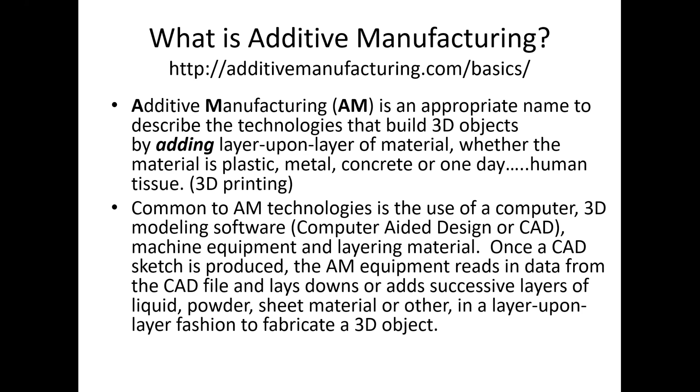Metal casting was one of the original users of additive technology. We're not Johnny come lately. We're actually among some of the very first people who used additive technology. We used SLA to make plastic parts that could be turned directly into investment casting. We used it to print or cut layers of paper and make patterns out of it. You can see that we had a seminar back in 1999 with Jim Conley talking about fast freeform fabrication as a way of moving forward the technology of additive in steel casting technology.

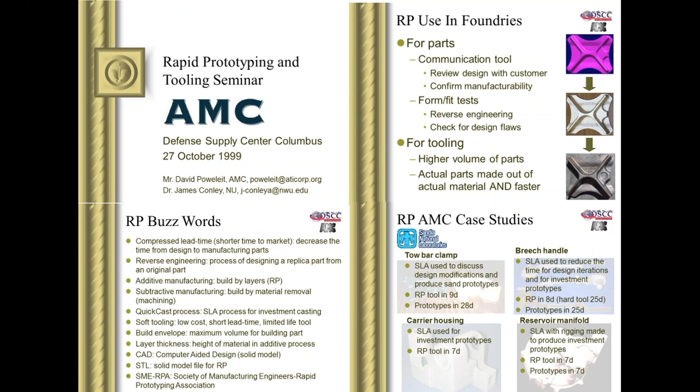So to give you some background why Steel Founders Society and additive: steel casting producers are one of the most, if not the most, advanced users of solid models and process modeling. Most steel foundries have solidification modeling, and they use that to manage their process and ensure quality. We were also early adopters of additive because our solidification model already used STL files, so we already had the infrastructure to move those over and make investment casting patterns, prototype tools, or printed sand molds or ceramic molds and cores.

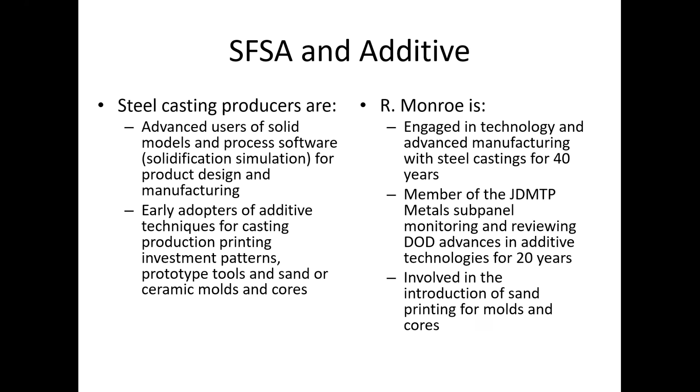Now, personally, I've been engaged in technology and advanced manufacturing for steel castings for over 40 years. I've been a member of the Joint Defense Manufacturing Technology Panel, Metal Subpanel, as an industrial advisor for over 20 years. This is the panel that would review all of the DoD-related advances in additive manufacturing. So I've been involved from the very beginning of the development and transition into use within the Department of Defense. And I was involved with Ralph Resnick, who was the first runner of America Makes, when he brought the ExOne, the printed mold technology, over to the US. So we've been involved with additive from the very beginning.

And so I thought I'd go through briefly some of the advantages and then talk about some of the issues. I tried to give you just a flavor of how additive and steel castings interact.

Now, what makes a part attractive for additive manufacturing? If I can put several parts together that I used to have to make independently, if I can put more functionality in the part, if I can reduce the weight of the part, these are the primary benefits. Less waste is less attractive, although for expensive materials, it can be important.

One of the big advantages are these first two: lead time reduction. If I've had to make tooling or do process development or acquire material, with additive manufacturing I may be able to reduce the lead times dramatically. And if I only have a small amount of production or I have obsolete things, I can reduce my inventory of both tooling and parts if I can manufacture them rapidly with additive manufacturing.

These two are not nearly as clear. Supplier risk: additive has the same supply chain kinds of issues as any other manufacturing, so it's not clear, and in fact, oftentimes when you have a critical part, you have to qualify both the process, the machine, and the supplier. So you may have less supplier redundancy than you do with other manufacturing methods.

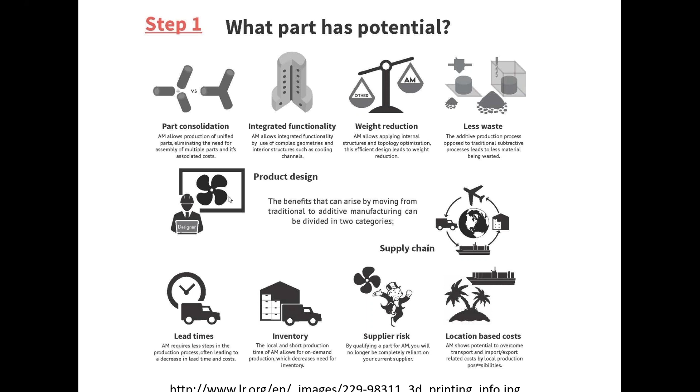Additive, one of the big benefits is it gives design freedom. Traditionally, mechanical engineers and other design engineers oftentimes put things together the way kids put Legos together. They have standard mill products that they cut into pieces and then weld or bolt together. With additive, I can have complete geometric freedom.

So these are some example geometries where you wouldn't ordinarily make any of these geometries out of fabricated parts. Some of these aren't bad for fabrications, but they're not attractive. But you can make all these clever geometries to achieve certain design characteristics.

So traditional designs often rely on standard material forms. One of the key historic attributes of castings is this design freedom. It's hard to imagine how you can get the internal passages and the complex material shapes for engines, heads, and blocks if you didn't have casting technology available. Additive early on was called fast freeform fabrication, talking about its geometric capability.

And of course, all techniques that have internal cavities, whether it's casting or additive, you still have to be able to look in that hole, get rid of the material, and inspect and make sure you've made the part.

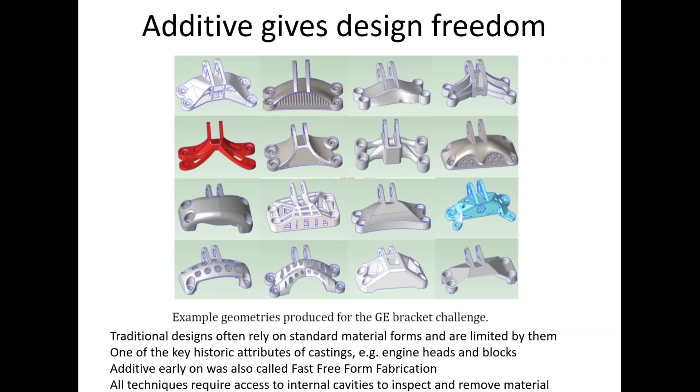One of the biggest benefits is castings. One of our biggest challenges historically has been to make the first casting, I have to make a tool. And the time and expense of making the tool may take so much effort and so much expense that you can fabricate or machine 5 test articles in the money and time it takes me to make the tool. So making that first tool took time and money.

Not only that, it meant that you already had committed to a particular design concept and had limited opportunity for improving and changing it. And so additive actually accelerates the development dramatically. So instead of 8 weeks to get a tool, I can give you a part in 3 weeks.

But it's better than that. I can not only give you a casting in 3 weeks, I can actually give you 4 different castings for the same part. So if you have alternative design concepts, additive manufacturing, additive printing of molds or cores allows me to make 4 different concepts without ever committing to a tooling. And that allows you to try some really crazy idea that you never would have tried before because you couldn't afford the tooling and the time, because it can be in parallel with the more traditional and safer designs.

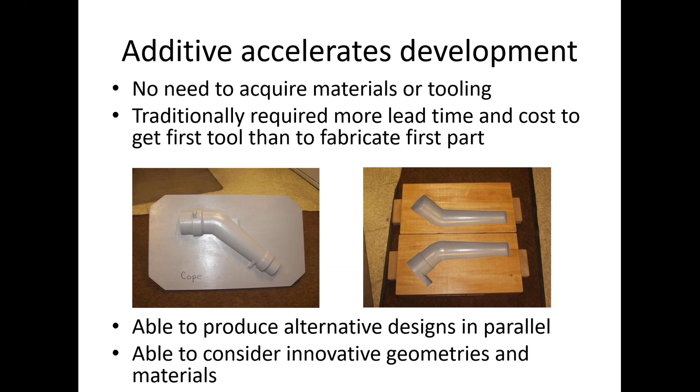So this is huge. I imagine that everybody that's creative and innovative in design is going to need additive manufacturing to accelerate their design process, and castings enable that by giving you qualified metal parts with good, reliable properties in alternative design paths that let you maximize the creativity and innovation of your design process.

If I look, additive allows for toolless production. So all of these tens of thousands of obsolete patterns, if we had solid models and we could print them, we could eliminate all of this sunk investment and this ongoing storage cost and maintenance cost.

But the challenges include: most of the time in traditional and obsolete parts, we don't have a normative, authoritative solid model. Oftentimes the parts are compliant with the existing tooling, but not with the actual drawings. And I may have a higher part cost and limited production by using printed molds.

But moving into the future, we certainly can see that obsolete and old, out-of-production, limited-production items, whether upfront or afterwards, will be made using this technology.

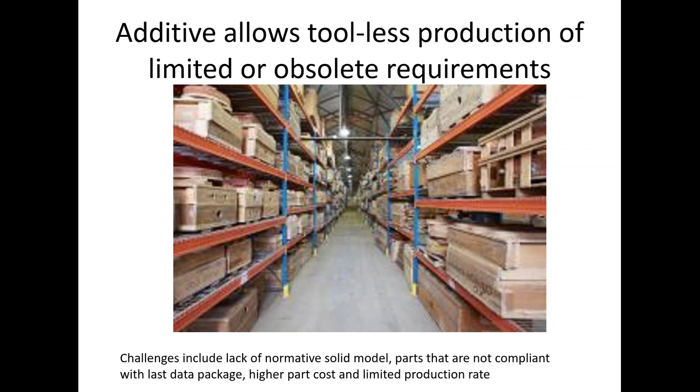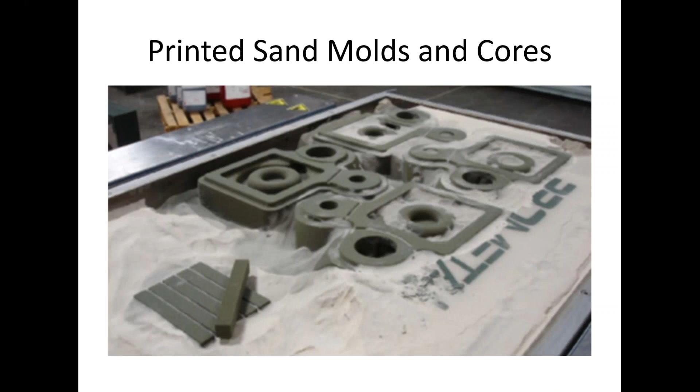We can print sand molds, and that's the huge benefit. I can get the additive benefits from printing the mold, and then I can get the metal performance out of pouring the mold with a reliable casting alloy.

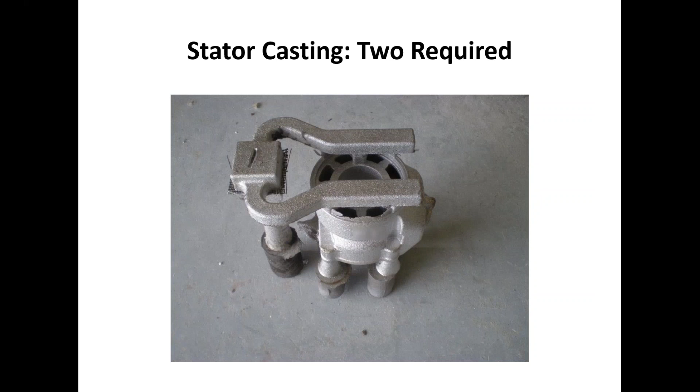And you can see we can make really complex molds. One of the best benefits, if we only need 1 or 2, we don't have to recreate the expensive tooling. We can make the 2 directly if we can get the solid model.

One of the biggest benefits right now is if I have complex parts like impellers that have multiple pieces, I can actually print a core faster and cheaper than I can make the core or make the die, and that saves me money directly. But it's better than that.

I actually reduce the dimensional variabilities, because instead of assembling several cores, I can make it as a single piece mold core combination and get much more repeatable and tighter tolerance parts.

That's one of the big benefits the Air Force is seeing in printed ceramic cores, because these little cooling passages used to have to be drilled, and so they had to be perpendicular and they had to be round. Now, if I can print a ceramic core, I can positively locate both the cooling passages and the vent holes and know that they're going to be in the right place, and I can change the geometry.

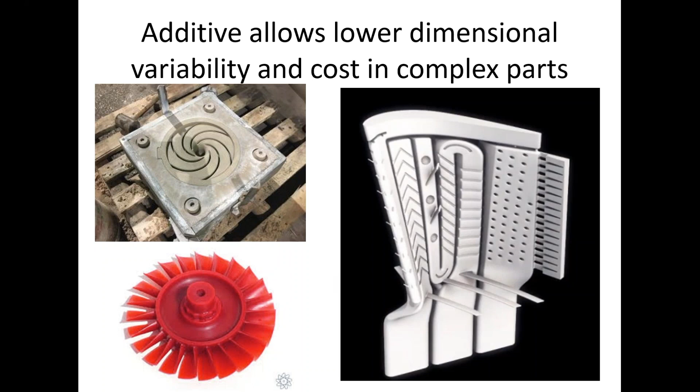So this is huge, being able to control dimensions and geometry and location in a way that I never could with assembled molds and cores or other manufacturing technology.

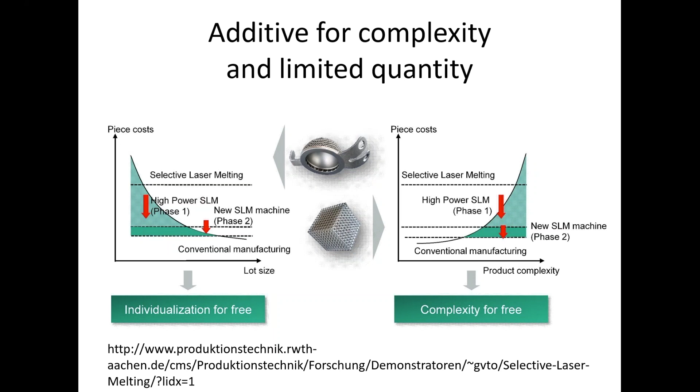So you can see that there's really two fundamental concepts that make additive attractive. One is if I'm only making a few, then I can eliminate the tooling and the development costs and go straight from the solid model. Or if I have a part that's really complex, then being able to manufacture it with additive gives me both the complexity and the cycle time that I want with low cost and high performance.

So what production process? I was delighted to find this because they recognize that printed sand molds, the ExOne or the voxeljet process, or the printing process, allows you to consider castings as one of your additive processes.

The others, of course, are powder bed or directed energy deposition. These are really welding techniques. Here you're welding, you're fusing or sintering the powder onto the part. Here you're actually welding the part together.

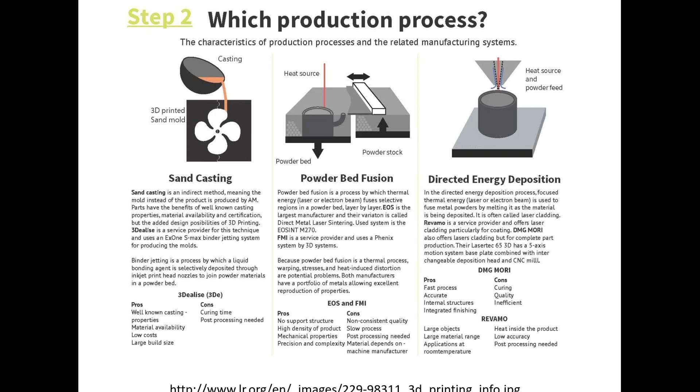So one of the criticisms some additive people make is that when I make a casting, I use production welding to meet the quality requirements. But if I'm doing additive manufacturing, the whole part basically is made with fusion welding type technologies. And so this is really the kinds of processes you can get, and here's a picture of them.

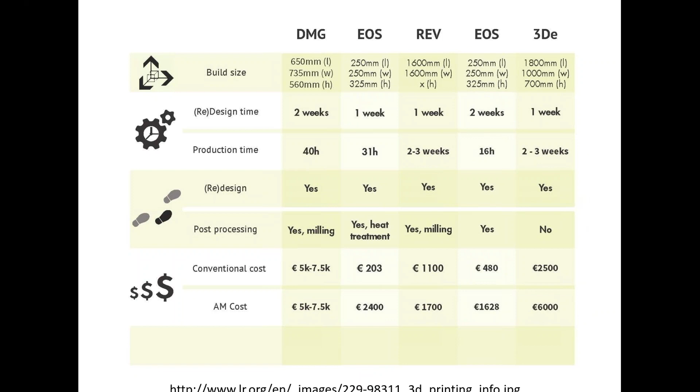You can see in this picture that most additive parts have really limited sizes compared to castings, and you have limited alloys. So it really is a challenge to make the maximum flexibility in a part without having castings as one of your opportunities. If you look at the materials, oftentimes you may want a bronze alloy, but the only thing you can print is a stainless steel. In castings, we can make the whole range of alloys. In additive, you have to depend on the powders that are available, the machines that are available, and the properties you need, so there are some real limitations.

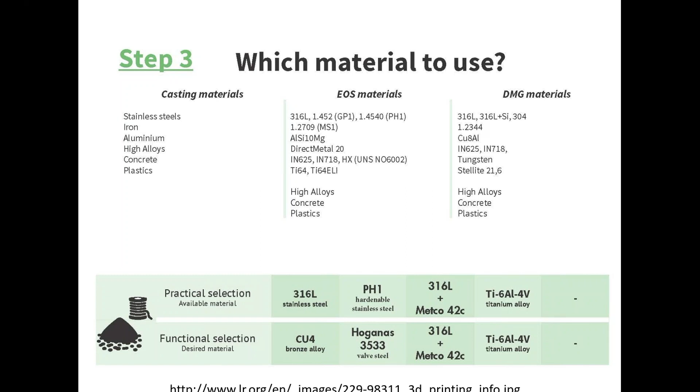Now, many of those limitations will go away, many of the limitations of performance will go away. But at this moment in time, there are some real challenges to being able to fully utilize additive metal printing. One challenge is that, depending on the orientation, horizontal, vertical, different angles, different post-processing, you can get a wide range of properties.

This is for 17-4, a high-strength stainless steel used in structural applications. You can see, depending on orientation, my yield strength can be half of the yield strength of the mill product, and my ductility can be well less than half. Now, that's not always common, but because of that, there are none that I'm aware of - standard processes with standard properties. So virtually every critical component in additive manufacturing where you're metal printing has to be qualified based on the source, the machine it's made on, its process, and part verification or part qualification. That's a real challenge.

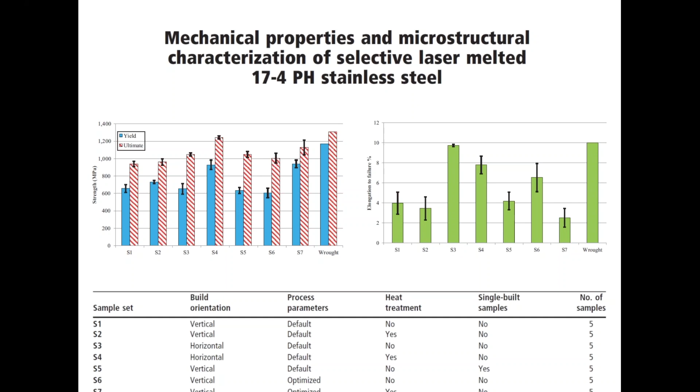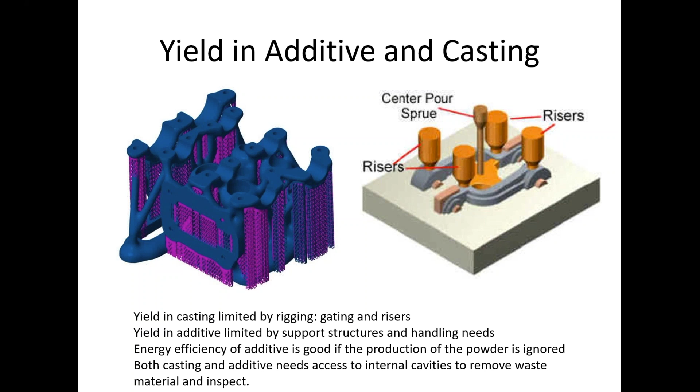Many of those problems go away because metal casting is a well-known technology. One thing people will talk about is yield, because at least notionally you get 100% yield since you can reuse the powder you didn't fuse. But oftentimes in additive you need a support structure to make these complex geometries. So the yield of a casting, which is limited by the plumbing system, the gating, and the risers, versus the yield on an additive part, is limited by the support structures and the things you put on it to handle.

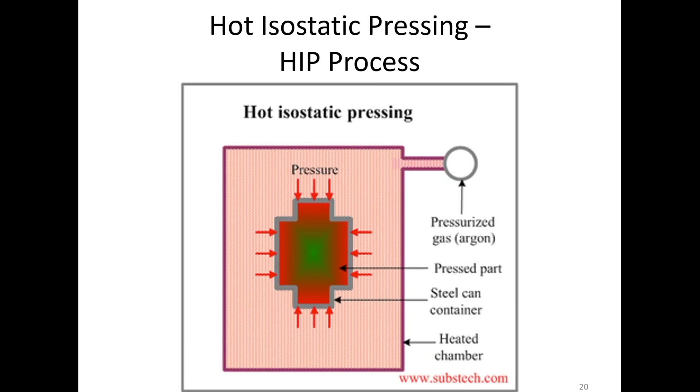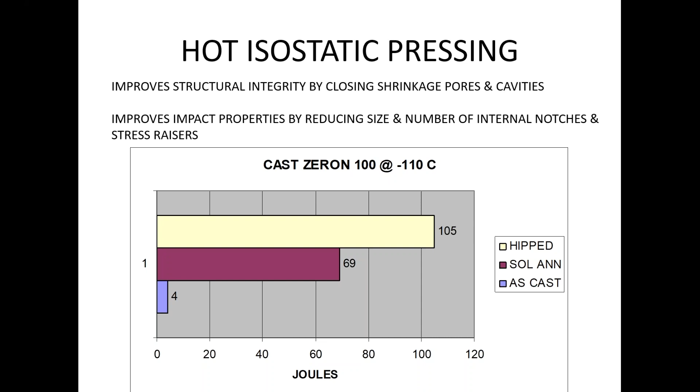One of the great benefits is that many of the quality challenges and performance challenges of printed metal molds are similar to the challenges of getting optimal properties out of casting. For example, additive routinely uses hot isostatic pressing to maximize mechanical properties. We get the same benefit in castings by using hipping. So the infrastructure for design, quality assurance, and post-processing used for additive manufacturing will seamlessly provide benefits for steel castings. You can see this is hot isostatic pressing of the cast Zeron 100 material. The solution annealed material gives really nice impact properties, but the optimal impact properties come from hipping because you reduce the size and quantity of small shrinkage pores and cavities.

If I look at a comparison, printed metal parts with additive are the newest and coolest technology. If you want young people to come through your facility, you want to show them your printed stuff. The VP of operations or marketing wants to come through and see your printed molds. But it requires source and part qualification. One huge benefit we don't have in castings is that you can make constitutionally graded material, going from a hard surface to a tough, ductile center by changing the material as you build the part. And of course, the parts are limited by the machine size.

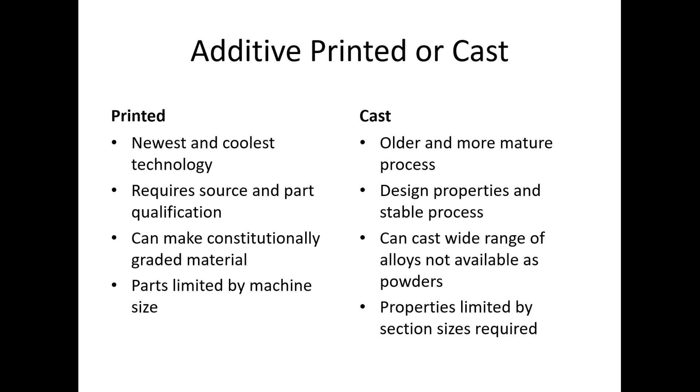In casting, you have an older, more mature process, which has both advantages and disadvantages. The advantage is being well known and having a controllable process. The disadvantage is it looks like old technology, so it's not as exciting. You have design properties already available in a stable process. We can cast the widest range of alloys of almost any process, and the properties may be limited by section size. In a printed metal, since it's a welding technique, no matter how thick the section gets, I get relatively uniform properties, or lack thereof, based on the actual build schedule. In castings, because I'm limited by physics, when the part gets thick, the solidification rate is slow and my mechanical properties may be different.

So the benefits, as I see it, of additive are geometric freedom, not being tied to existing material form, the ability to move directly from a 3D design solid model to prototype and production without the cost, time, or need for tooling or process development, the capability of considering alternative design paths, and the ability to produce limited quantity obsolete parts or complex parts with no existing tooling.